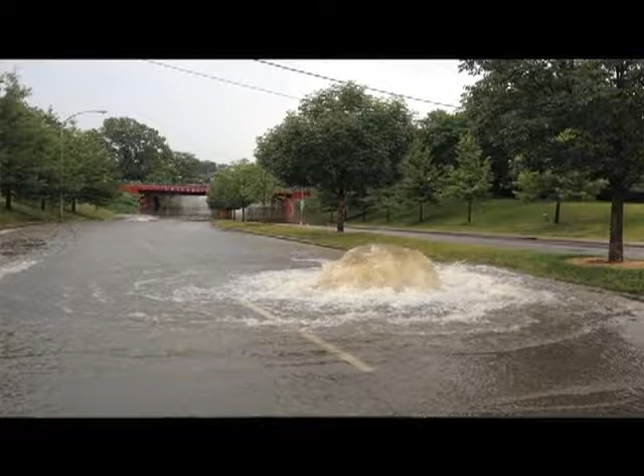We want to make sure you understand that, so you can take precautions. It could be in the stream, it could be in the street—sometimes you see it happening, sometimes you don't.

But it all ends up in our water bodies and waterways, in the form of litter, human waste, and debris that comes out of the sewers—things we may not even know is happening, but we see the end result. So we're here to talk about that.

We're going to talk about why these sewers overflow in the first place. Because if you didn't know that was happening, your next question should be, why in the world aren't you doing something about that? And we are—so we're here to share what MSD is doing to help.

But we're also here to share what you can do to help us help the problem, because MSD alone can't do everything that needs to be done to take care of the system.

A lot of it happens on the side of the sewer that we don't own or maintain, so we're going to talk a little bit about that as we go through.

Now, do you remember the days of Smokey the Bear, and 'do your part, help prevent forest fires'? Well, this is Kid Win, and he's our mascot helping us spread the word to help clean up our waterways.

So he's going to show up from time to time as a way to break up this presentation, so you're not just sitting there listening to me talk and wondering when you can get out of here, okay?

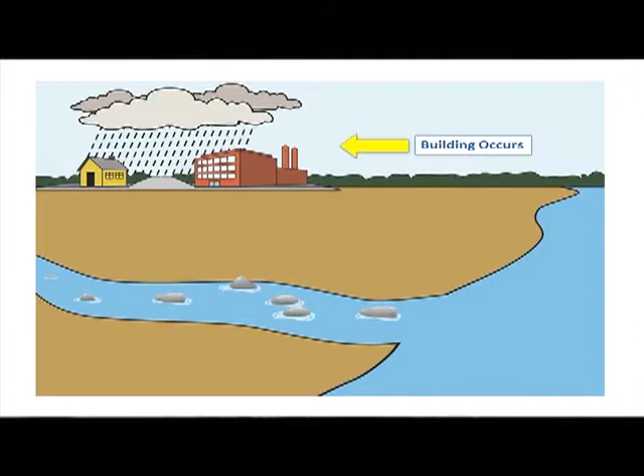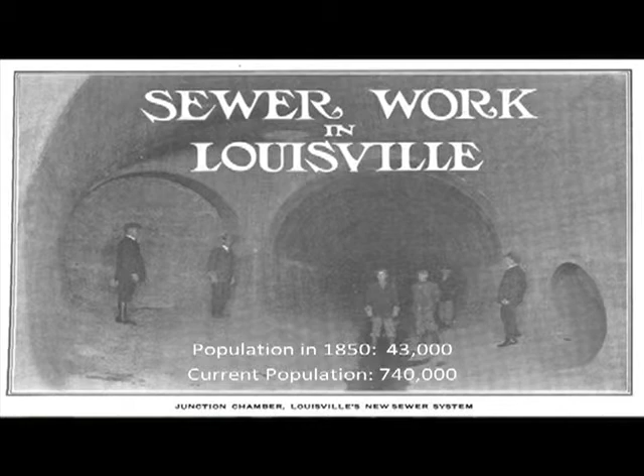This is a picture from 1850 where sewers began to be developed. There were only 43,000 people in the city of Louisville at that time, and we're sitting at about 740,000 now. So back then, they planned for growth. They made some really, really big sewers, but really what they did was take the existing creeks that were already there and encase them in concrete or whatever they could find.

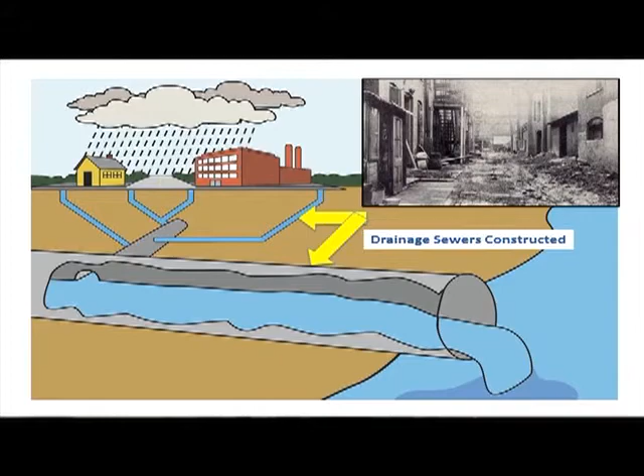So here's a picture of some of those systems. Some of them were very crude - they just dug out the drainage ditch and put something on top of it so they could build on top. And theirs was very sophisticated, where they built a huge sewer.

We still use this sewer, by the way. It's in great shape. This was obviously before it had any water in it, and these folks were able to stand in there in their suits and ties. But this sewer, on an average day, won't run as high as those folks that are in there, but you can see how big it is. It's 27 feet tall by 17 feet wide. It's huge.

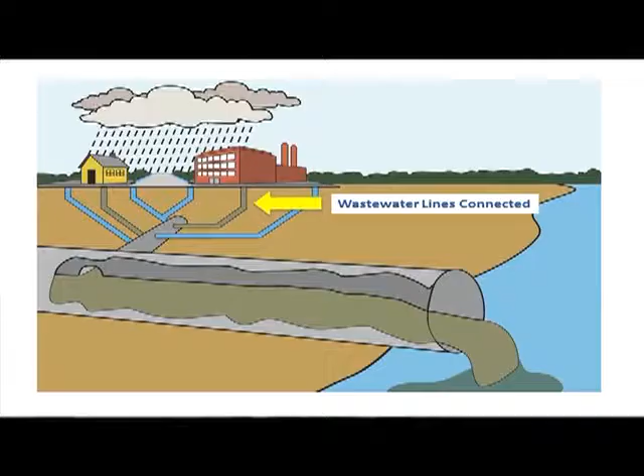Fast forward some more, in the 1860s, the Louisville Water Company got running water into homes and businesses. So now you have a situation where you've got a lot of fresh water coming in very fast, which means a lot of waste is being developed very fast, and so you've got to find a way to get that waste out of the house. The chamber pots and waste disposal methods they had weren't working, so they had to figure out how to get that waste away from the people faster.

Well, remember, there's these big pipes that were the streams that are now bigger pipes going straight to Beargrass Creek or the river. They just connected it to that pipe, and so now you had not only stormwater going when it rained, but you had waste from homes and businesses going out to Beargrass Creek and the Ohio River every day. That was the method that was used before treatment.

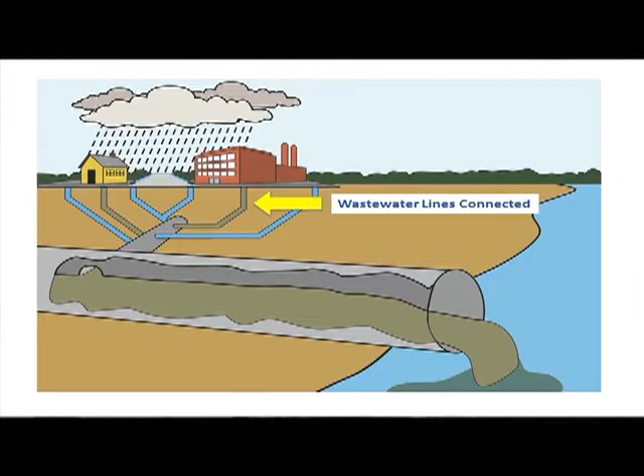So we know that getting running water to the houses and getting sewers in the ground were good for public health, because we show where typhoid rates and disease went down when that occurred. But we're still before the time of wastewater treatment.

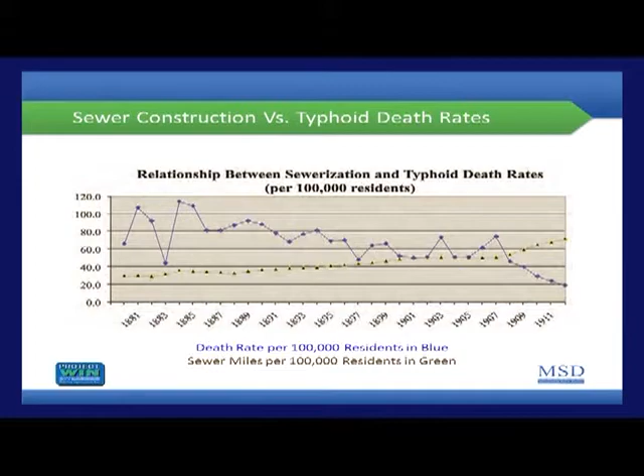So in 1948, the Federal Water Pollution Control Act mandated that entities, cities, put in wastewater treatment. It took 10 years from that mandate for the city of Louisville to build and put into operation our first wastewater treatment plant, which we at the time called Fort Southworth, which is still in operation.

It's called Morris Forman now. So go back then, you've got the water that falls on the ground when it rains, plus you've also got the waste that's going into the pipes every day. So those pipes are going to fill up, because they knew back when they built these pipes, they would never build a system large enough to treat all of the stormwater and all of the wastewater. So they sized it for all of the wastewater and as much of the stormwater as they could treat at the time. So the water comes in, hits the ground, goes into these pipes, gets into the big pipe that used to be a stream that went out to the river or Beargrass Creek.

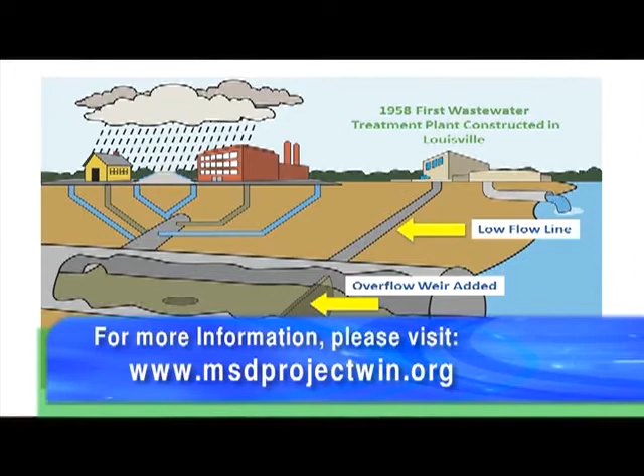Where it used to go straight out, since the treatment plant is there, they put weirs in the old stream that cannot go all the way to the top because there's too much water in that pipe when it rains. They put an opening in the bottom of that old stream bed, now a pipe, and drop that flow in on a dry basis. Every day it comes in, goes to the treatment plant, gets treated, and comes out. When it rains, there's more water than can get in that smaller pipe.

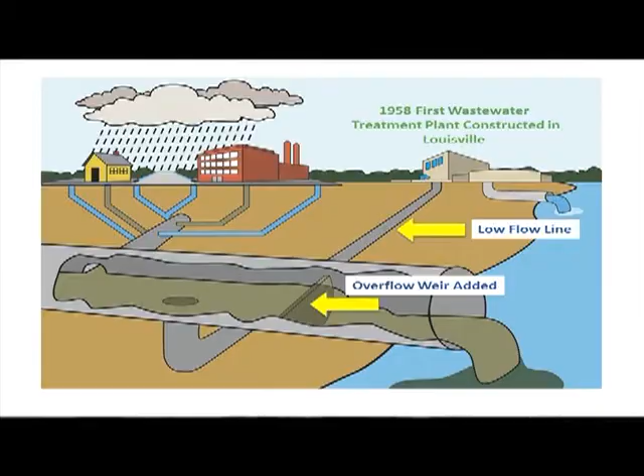So the rest of it goes out to Beargrass Creek or the Ohio River. That's how sewer overflows first came to be in Louisville. It's like this in every river city east of the Mississippi. They all developed the same way, and they developed further because that was the technology of the day.

Now, development started in the city of Louisville and worked its way out. Picture the Watterson Expressway, I-264, as the differentiating line in 1955 where development had worked its way out. In 1955, the state of Kentucky said you can no longer build sewers where all the drainage and all the sanitary flow is in the same pipe, because we've learned that's not the correct technology to use.

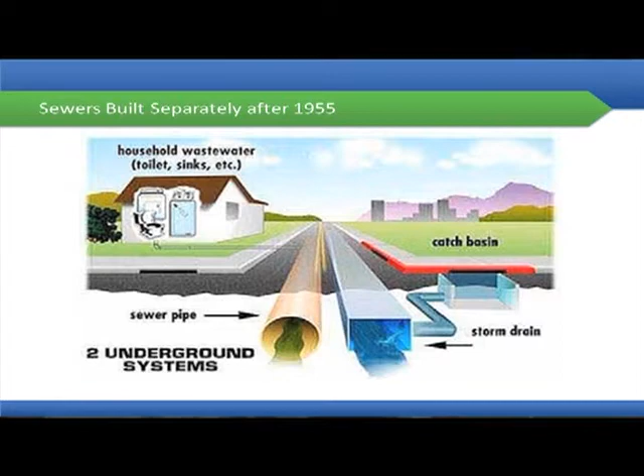So what they said is that we had to do it separately. In the picture you see a separate storm sewer system, which could be a pipe, a channel, or a ditch in the yard, and a separate sewer pipe. Theoretically, they're supposed to be separate.

But what we have found is that everything wears out with time. The sewers that were originally put in were made of clay, terracotta-type material. Picture terracotta pots you plant in — when they dry out, they crack, and as the roots of that plant grow bigger, they create openings, and if you barely nudge that pot and it falls over, it's going to break. The same thing happens underground with the pipes that were put in using the technology of the day.

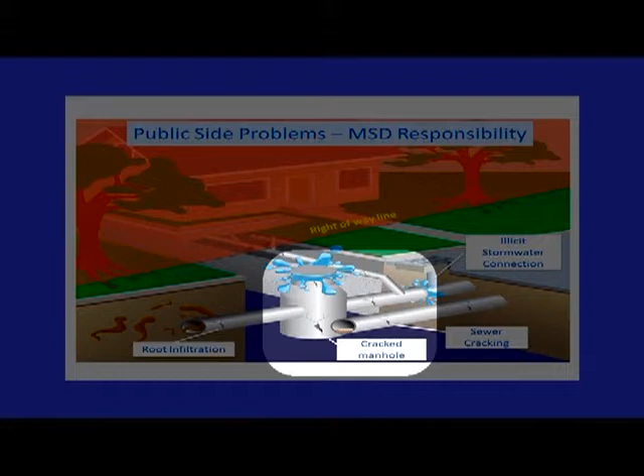We're slowly lining through those pipes and getting rid of those, but what we found is that they will crack, and as development occurs, you'll have stormwater catch basins connected to the sanitary line instead of the stormwater line. That manhole barrel, the connecting point, will also over time crack as ground freezes and thaws, and we have movement in the ground as you go through the seasons, and over time that's just something that happens.

And then you have roots — particularly in the summer when it's dry and there's not a lot of rain and water for the roots, they're going to seek a nutrient source. So if they find the smallest crack in that pipe or manhole, they're going to grow into it, and they're going to make that crack larger. It's just a process that continues.

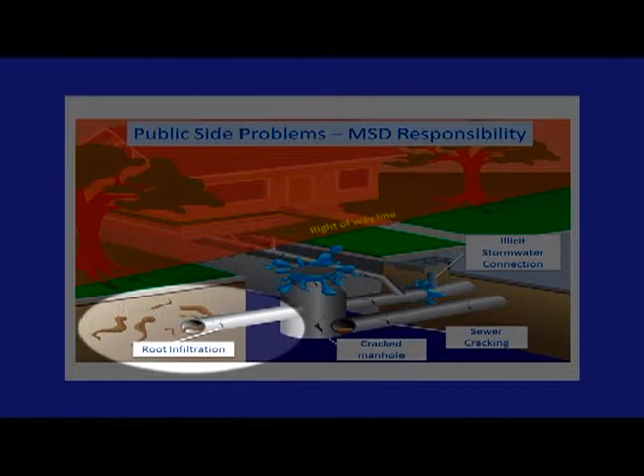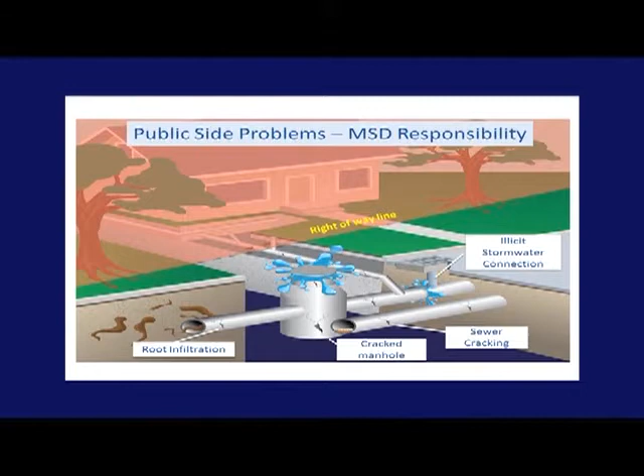So those are things on the public side of the system, or the right-of-way line, up to which MSD will maintain, versus what we're getting ready to talk about — the private side of that line. Let's look at that. There's that right-of-way line where probably there's a clean-out on your property, whether it's a residential home or a commercial property. That clean-out is pretty much the differentiating line between the public side and the private side.

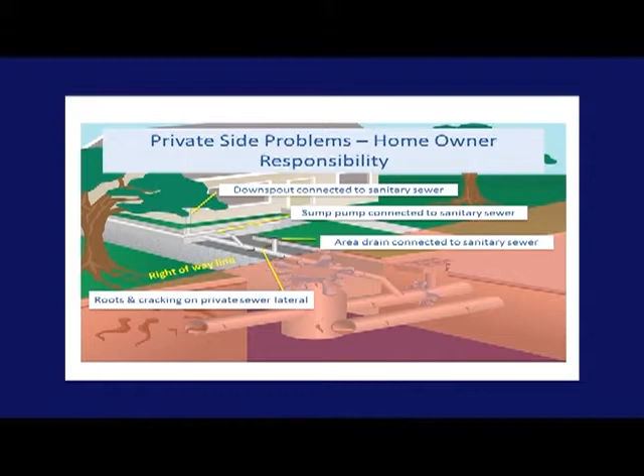The same types of things can happen on that private side, but a little different. A downspout that takes rain off the roof — instead of connecting that out onto the ground and letting it run across the grass, it can be improperly connected to the sanitary sewer, so that's taking stormwater and putting it in the sanitary sewer.

Or you could have a groundwater sump pump that is protecting your basement from groundwater. It's okay to have a groundwater sump pump, we just have to make sure it goes to the right place. We need to make sure that groundwater sump pump is not pumping into the sanitary sewer — it needs to go out onto the ground or into the stormwater system.

You could have an area drain, an area that's part of your grass or a parking lot, that instead of taking that water to the stormwater system, puts it in the sanitary sewer. Then that private line that comes out of the home or business up to the right-of-way line is the responsibility of the property owner to maintain.

It's made of the same material. The older ones are made of clay. They can crack, get roots in them, and break. Sometimes you'll find this out the hard way and have a backup into your building or home, and a plumber will come out and tell you that's on your side. Sometimes you may not know that's going on until there's a problem.

We do have a program that will help the homeowner or property owner with the maintenance of that private line. You can get information today from our customer service representatives about the sewer line replacement program, where we will finance the fix of that line to make sure it's in good operating condition.

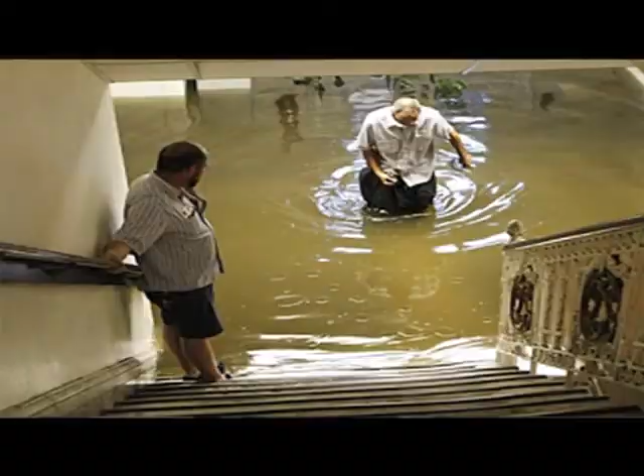Sometimes those overflows are your neighbor's basement or your basement, and we want to make sure that's not happening. Where that's seen the most, when those sewers are overflowing, it could be a backup. That's a direct impact to public health, and we're really trying to get the word out to help us stop that from happening.

So here's another check-in point. One of the takeaways is that we can avoid, if possible, running our dishwashers and washing machines when it's raining. Please note, I'm not asking you to not take a shower, not take a bath, or not do a load of dishes in the sink, but to refrain from those large sources of water if we can.

Here's another thing I bet you don't know, and you'll never know the impacts until something bad happens. When we flush things down the toilet that don't belong there — they belong in the trash can — they find their way very strategically around the impeller of a sanitary pump station. Dental floss, hair from brushes, Q-tips, and flushable wipes that are not actually flushable, regardless of what the package says, wrap themselves around the pump's impeller, and when enough wraps around it, it stops pumping.

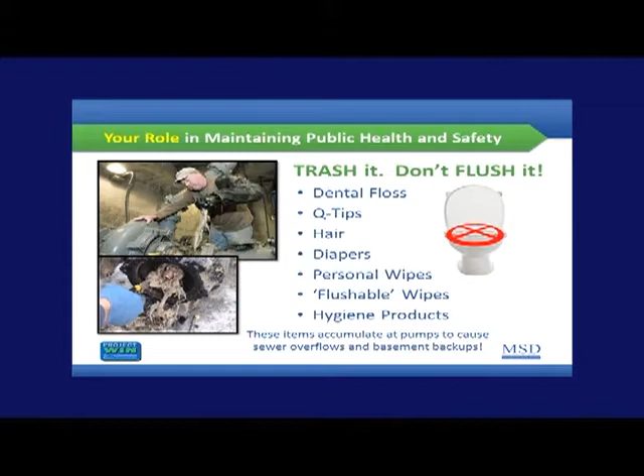Imagine when a sanitary pump station that's meant to keep sewage moving downstream away from the house stops pumping. Bad things happen, and bad things result in basements that back up. We want to prevent those from happening, but we can't stop that. We can only react to it because we don't know where that source is coming from. So we're asking everybody, every chance we get, if it belongs in the trash, throw it in the trash. Don't flush it down the toilet.

I'm sure you've heard about fats, oils, and greases and what to do after you cook. We've been talking about this for a long time. That rumor used to be that if you turned the hot water on long enough and got it really hot, you could pour your grease down the drain and it would go away. Well, if you're lucky, it might leave your sink, it might even leave your house, but it probably isn't going to get very far before it congeals.

And when everybody's doing that—or it really doesn't take a lot of people—it's going to fill an 8-inch sewer that's out in the street pretty fast. It's going to be like a pump station that stops pumping; it's a sewer pipe that stops flowing. And again, the same result: we have basements that back up and overflows that happen.

So what we're asking people is, don't use your garbage disposal. Don't put it down the sink. Let it congeal. Take a napkin, take a paper towel, take all food, all sources—if you're not composting it, put it in the trash. Because it's going to find itself in the sewer, it's going to bind up, and it's going to create a concrete-like substance, as you can see here, and it's going to cause backups.

Again, we can't stop this from happening. We can only react to it after it happens, and it's a bad thing. So we need your help going through this particular situation.

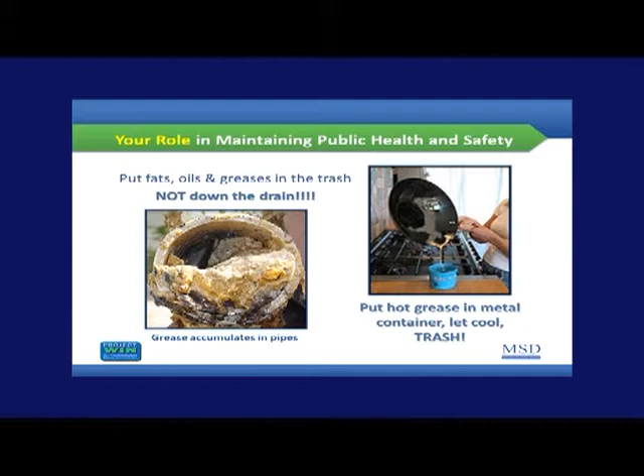So here's a check-in point: what do we do with dental floss, hair, and those wipes that even though they say they're flushable—put it in the trash, don't flush it.

A lot of times we're going to see that when it's raining that way, there are a lot of sump pumps pumping groundwater, protecting basements, but instead of putting it on the ground or into the stormwater system, those sump pumps are going straight into the sanitary sewer. That sanitary sewer is not sized to take that—it's sized to take waste from homes and buildings only. So when we've got sump pumps in our basements or on our foundations pumping into the sewer, that's what's causing those massive overflows, at least 50% of it.

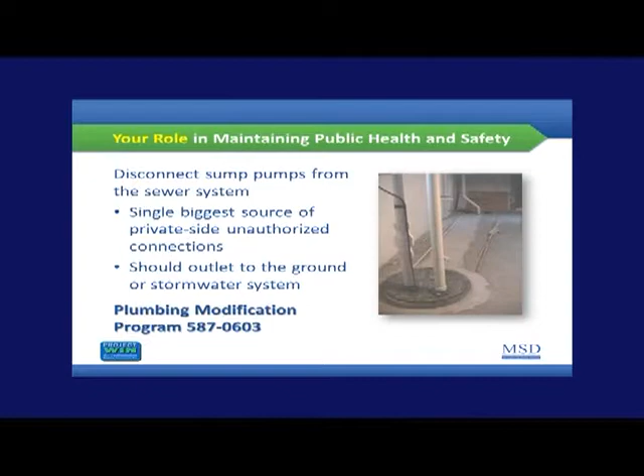So again, we've got a program, the plumbing modification program. We'll disconnect it, we'll pay for the disconnection to help with that, but we've got to have your help to identify that. You can get that information—again, the customer service desk can give you that information. We'll walk you through the process. We'll pay to have it disconnected, but we need you to help identify where that might be.

And then downspouts—a downspout in the summertime is a free source of clean water that you can use to water your gardens, your yard, that we're hoping isn't going into the sanitary system. Like a sump pump, we'd rather you turn that out onto the ground, into the grass, away from your foundation, or turn it into a rain garden, or put it into a rain barrel. We've got information on that, but it's just a way to keep more stormwater coming off that roof—an amazing amount of water during a good rain—out of the sewer system if we can't keep it on the surface.

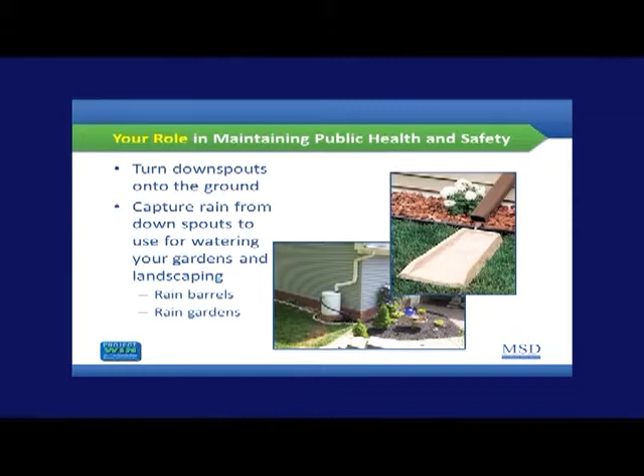So here's question number 4: FOG, what does FOG stand for? It's fats, oils, and grease—basically any food that you're cooking with or that is residual after you've cooked and eaten. We're asking that you put it in the trash, don't dispose of it down the drain.

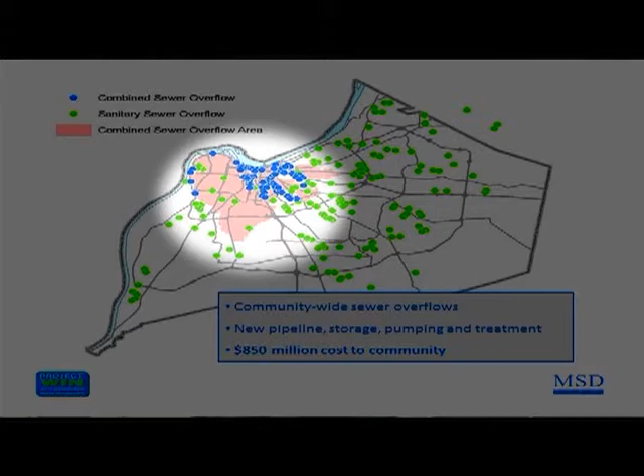The blue dots in this area represent the combined sewer system - those are the earlier overflows that were built before wastewater treatment. The dots outside that area are separate sanitary sewer overflows, from systems that were built with separate stormwater and sanitary systems, but sometimes there's too much stormwater entering that sanitary system from different sources.

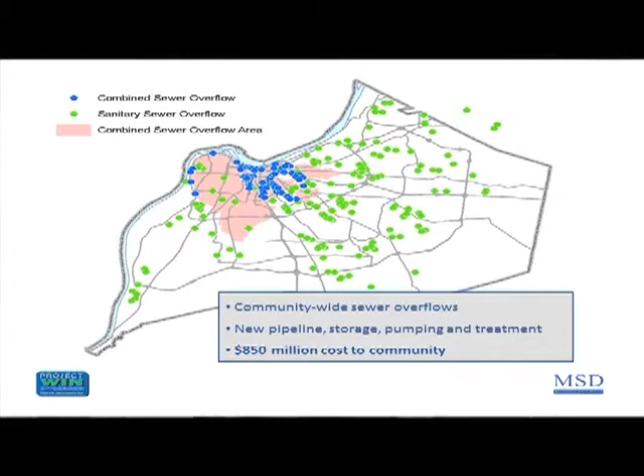So what this map represents is that there is no area in Jefferson County that's not subject to sewer overflows. We have a community-wide problem that's going to require a community-wide solution. We're taking this message all across the community, to say help us take care of this situation so that we have a safer place to be.

So a little bit more of the history of how things have progressed. From the 1980s through 2005, MSD was focused primarily on getting rid of sources of pollution that were occurring every day. As development occurred and moved out from the core of the city, it happened in pockets, and so there were what we call package treatment plants, or small treatment plants.

They were not operated by MSD or the commissioners of sewage at the time - they were operated by the developer of that subdivision. The state asked MSD to take those out of service because we could do a better job operating them, keeping them in good operating condition, and ultimately eliminating them. So we spent several years acquiring those, fixing what we could, and ultimately taking them offline and connecting them to the municipal system that's in place today.

We were doing that while also addressing the sanitary overflow situation that was going on. But EPA came in and said, we recognize what you're doing and it's a good thing, but you're not working on those other problems of pollution, those overflows, fast enough. And what they said is, we want you to now focus on that.

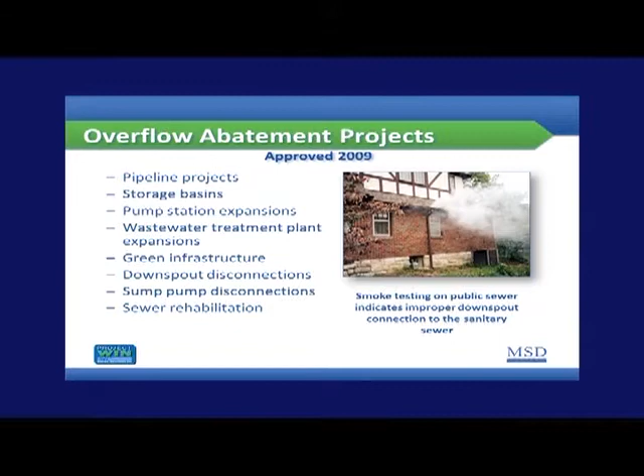So what you see here is on a dry day in this particular neighborhood, we were testing those sewers to see where the leaks are. When the sewer levels are low, it's not raining, it hasn't rained, there's not a lot of water in there, we'll fill those with smoke and see where that smoke comes out. In this case, it showed us that particular home's downspout was connected to the sanitary sewer. So we're able to tell the homeowner, and work with them to put them through the program to help get that connected properly.

So just as a check-in point, we're halfway through the program. We're about 51% complete. We're running right at budget, actually a little bit below budget, which is a good place to be halfway through the program. So we're always checking that to see where we are on that federally mandated schedule.

In terms of where we've been working, because there's a countywide problem of overflows, and there is only so much money that can be spent at one time because of how it's paid for, and the schedule to accommodate everything by the end of 2024, we've been working in certain areas very systematically to make sure we could take care of things in a proper order. You work upstream, starting at the top and working through the bottom of a particular area, or in some cases you work in areas where EPA tells you to go work first. We've been doing that in Beechwood Village, Hikes Point, Highgate Springs, where the majority of the overflow volume and occurrences were happening, and that's where they told us to go work first. We finished that work in about 2012.

We've been continuing to work through. We've been doing some work in Camp Taylor, and we'll tell you where we are on that. We're continuing to work in the areas of J-Town and Prospect because there are 6 treatment plants, some of those older original plants, that are in that older age of plants that are failing, and EPA wanted us to remove those by a certain date. We're doing that - those will be finished by the end of 2015. By the end of 2015, there will only be 5 treatment plants run by MSD in Jefferson County. That's huge because we started at about 300. So every time you eliminate one of those, you reduce an everyday source of pollution into those creeks that we like to recreate in.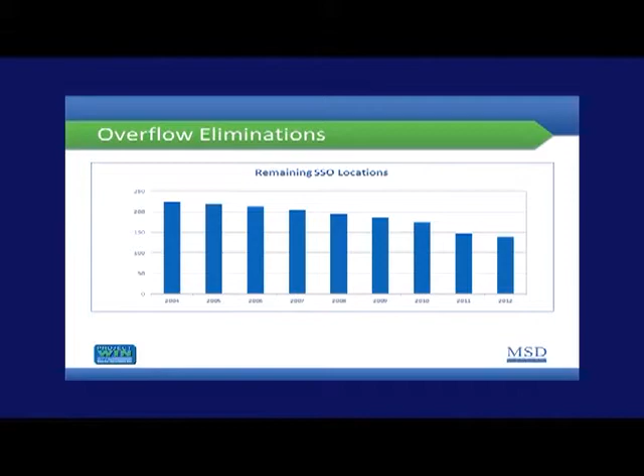So here's how to show the progress that we've made in terms of overflow locations. There's over 200 SSO locations - these are not the combined sewer overflows in the older part of the system, these are in the separate sanitary sewer and separate stormwater system. We started at about 225, and you can see how that number slowly goes down. Every project takes about 2 to 3 years on average just to construct, and another 1 to 2 years to design, so the process is slow. When you start that in 2007, you can see how we're slowly building that out, moving these projects forward, and those numbers will start to come down.

So here's a check-in point - this is question number 5. It says sump pumps should discharge to the ground or to a stormwater system and not into the sanitary system. We are asking you to check: if you have a sump pump, check and see where it's going. If you don't know, or if you know you have one and don't know where it's going and it hasn't been checked out, call MSD at that number and we'll work through that process with you and help you get that reconnected out into the stormwater system.

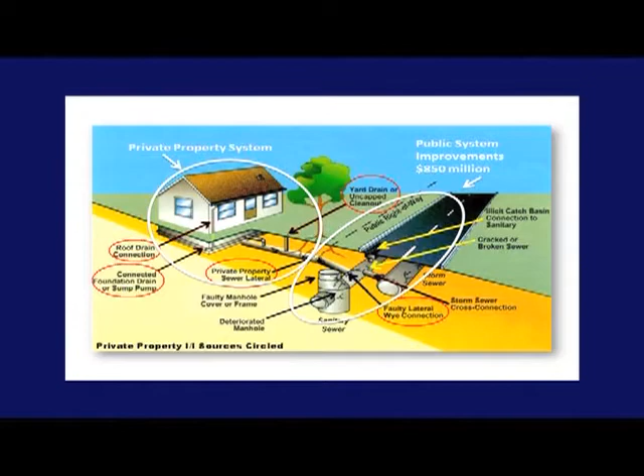We've talked about what we're doing on the public side. There is a cost associated with that, about $850 million to fix the problems on the public side of the system, from the right-of-way line down to the treatment plants. Some of the other things we talked about are that there are still openings in the system, still defects causing overflows on the private side of that right-of-way line, where we've asked for your help going forward to partner.

The last question on the little blue sheet is question number 6. It says, to make good use of fresh, clean water, we can use rain barrels and rain gardens. We have information at the customer relations table if you'd like to learn more about incorporating that on your property. You use them in the summer - rain barrels are only for the summer, not to be used in the winter because they will crack and break. It's a summertime usage.

So as we look at where we are and working together to fix this problem, we want you to take this home. On the back side there's some information, some phone numbers to call if you want more information or if you experience a problem. If you see a sewer overflow - it could be in a creek, in the street, or along the property line - please call us at this number, because sometimes you might be the first person to see it, and as soon as we become aware that it's happening, we'll make sure we send somebody out there to address that.

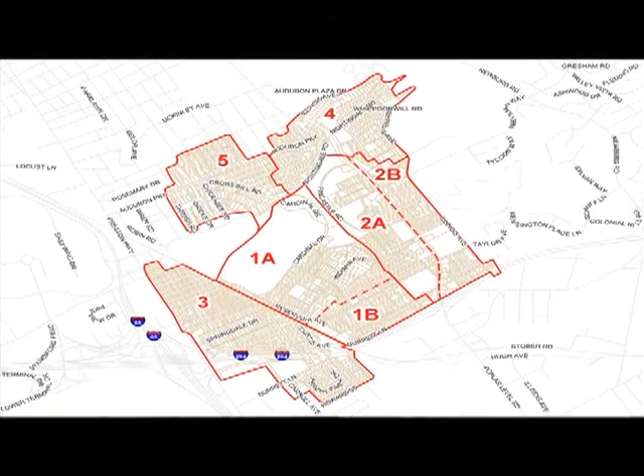One of the first things we discovered when doing the SSES is that we needed to expand the area. We always talk about areas 1 and 2, which is Camp Taylor, but area 3, Prestonia, Audubon Park, and areas 4 and 5 all flow through the Camp Taylor interceptor. So it didn't make sense to make improvements only to areas 1 and 2 without addressing the surrounding areas. For example, once we got into area 3, we confirmed over 180 homes had their downspouts connected. So if we didn't address all the areas, we wouldn't ultimately help Camp Taylor.

So the SSES recommendations gave us our checklist of what we needed to do. We needed to work with the neighborhood as much as possible to disconnect downspouts and sump pumps, and to look at existing area drains and yard drains. As part of the development, it appeared there were a lot of situations where, if a neighborhood corner had a drainage problem, a catch basin was put in place and tied directly into the sewer to get it out of sight.

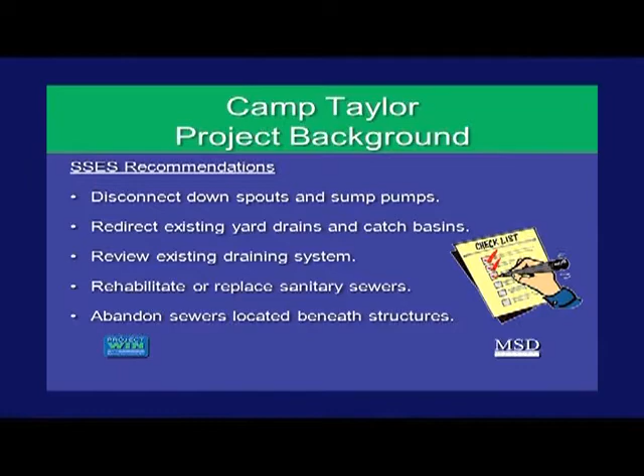We also need to review the existing drainage system. Any disconnections we do, downspouts or catch basins, we want to make sure we don't cause drainage problems in the area. We'll rehabilitate or replace sanitary sewers in the area. And a commitment we made is that we would abandon anything located under structures.

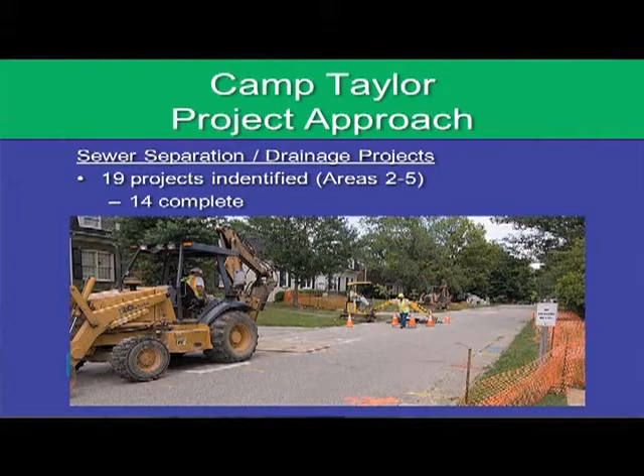So our first approach was the 19 area yard drains. You may have seen us out in the neighborhood - this covers areas 2 through 5. To date, we've disconnected 14 of those catch basins or area yard drains that were sending roadside drainage or area drainage into the sewers.

Areas 3, 4, and 5 have older sewers that were actually designed and put in place as they should have been. It's just that in the 50s and 60s, using terracotta pipe, a lot of them need to be rehabbed. In area 3, construction is already going on in the Prestonia area - approximately 16,000 linear feet of sewer repair and 80 manholes. Most of the work, which you've probably seen out there, is done without digging - we line the sewer lines, and once they cure, it becomes a new plastic pipe. It's a really good way of getting some of the sewers completed.

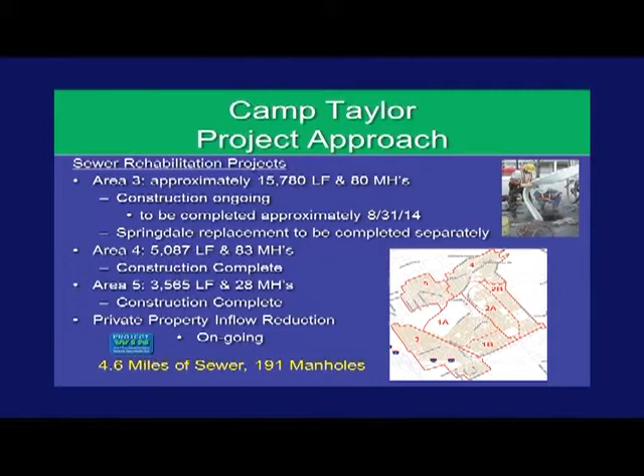In areas 4 and 5, we have completed all the rehab work - a little over 5,000 feet of sewers repaired in area 4, and about 4,000 feet in area 5. To date, we have lined or repaired almost 5 miles of sewer across these 3 areas.

The next stage is the Camp Taylor area, areas 1A and 1B. We're going to replace approximately 19,000 linear feet of sewer and 92 manholes, with construction scheduled to begin this September. I've been informed by staff that a lot of consent release forms have been sent out, and we're waiting for customers to return them. These forms give us permission to do the disconnections and improvements on their property.

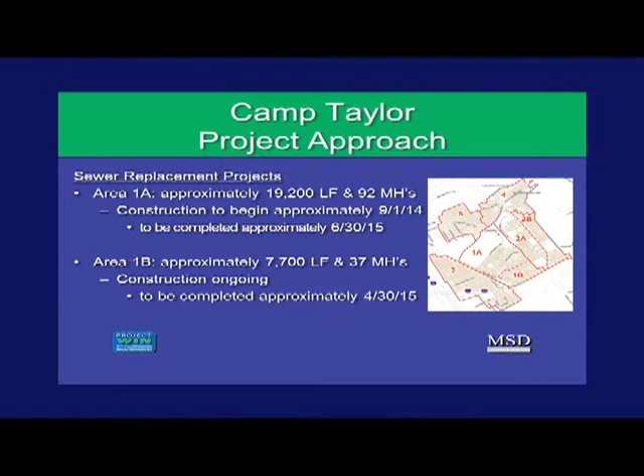That's ongoing and scheduled to be completed by the end of June 2015. Construction is also ongoing in area 1B, which is about almost 8,000 linear feet of new sewer, scheduled to be completed by the end of next April.

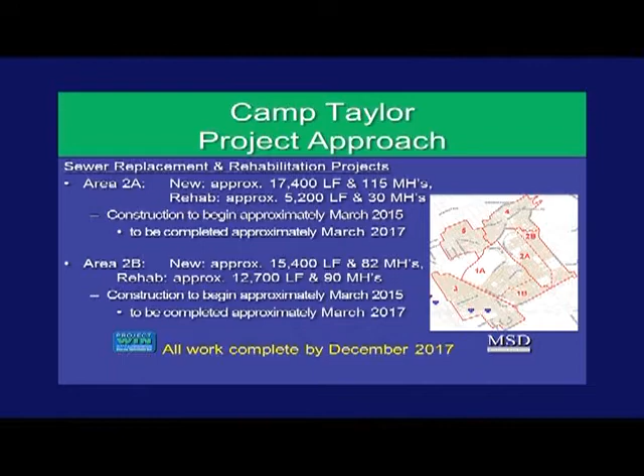Areas 2A and 2B are currently under design, with construction to begin approximately March of next year, 2015, and completion by March 2017. It's a large area, with 2B including another 15,000 feet of new sewer and rehab of approximately 13,000 feet of sewer, also beginning next March 2015 with completion in 2017. We're under a federal mandate, so while we hope to finish sooner, all work must be done by December 2017.

Moving on to the next part of the presentation, the Nightingale Pump Station and CSO Storage Basin. I'll go over the existing plan I presented at Camp Taylor Elementary School about a year and a half ago, and talk about the additional information and changes in the plan, and our path moving forward. As with all our projects, we want to provide opportunity for input. Our design staff working on the Nightingale pump station is here in the back, so feel free to write a question on a card or talk to them individually after the presentations.

Many of you may not know that at the end of Camp Taylor, as you move away from Poplar Level Road, there's a 27 MGD pump station—one of the larger sewer pump stations in our service area. I want to emphasize this is strictly a sanitary sewer CSO pump station, not a flood pump station. It handles what gets into the sewer pipes and sends it to our Morris Forman treatment plant to be treated; it's not for drainage or flood protection. It serves about 24,000 acres, a large service area, and diverts two of our larger interceptors, the Beargrass Interceptor and the Beargrass Interceptor Relief, serving Camp Taylor and surrounding neighborhoods.

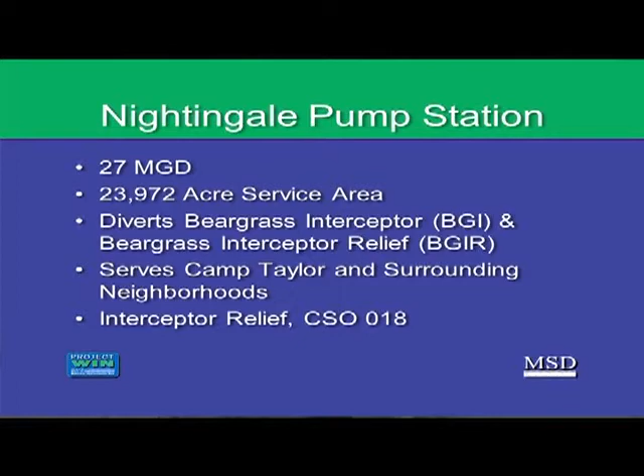This station is a little different since it's far out—typically we don't have a combined system in this area, but we do have some CSO reliefs. This is the reasoning for our consent decree project: there's a CSO associated with it, a permitted outfall that, when it rains, discharges combined sewer into the creek.

Just real quick, if you haven't seen it, this is the pump station—a square building above grade. When we're done with this project, that building will no longer be there. Here's the property in plan view: this is the pump station, and there's the CSO associated with Beargrass Creek that discharges during wet weather events.

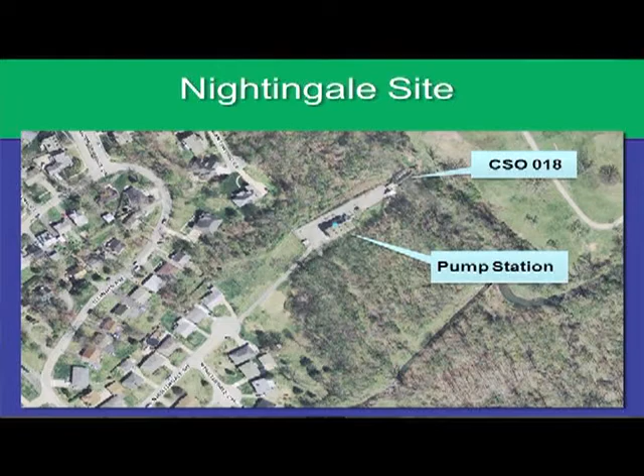To talk about the service area real quick—you've seen this map a thousand times, it's all over the room. I just want to emphasize that part of it, the Camp Taylor area, flows through the Camp Taylor Interceptor, so all five of the service areas we're working on flow northeast to this pump station. The star shows where the pump station is located on Nightingale Road.

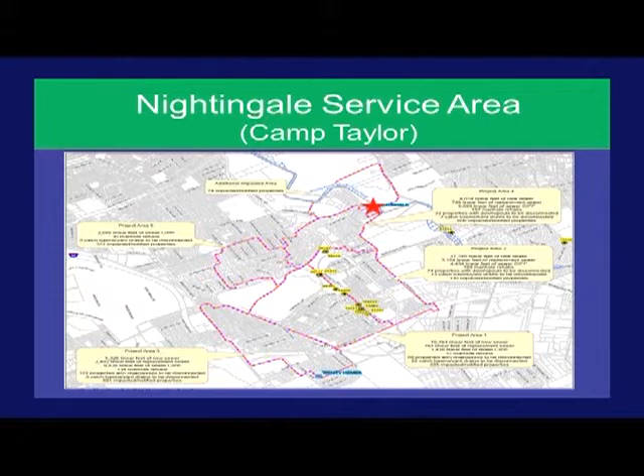To talk about the magnitude of this pump station—on the other side of the service area are the larger interceptors I mentioned, covering a large service area down to Shelbyville Road, bordered by 64. This large service area comes down to the pump station on the east side, so it is a significant pump station in size.

The original plan submitted in MSD's IOAP was to replace the 27 MGD pump station with a new 60 MGD pump station. The thought process was that as excess flow comes in, we'd pump as much as possible to treat at Morris Forman. That required a new force main—significant to the neighborhood, since the existing force main is 5,780 linear feet, and we would have had to construct all the way up Nightingale Road and through neighborhoods, which could have been a potential impact. The improvements would have been at the existing site, with a completion date of 2016.

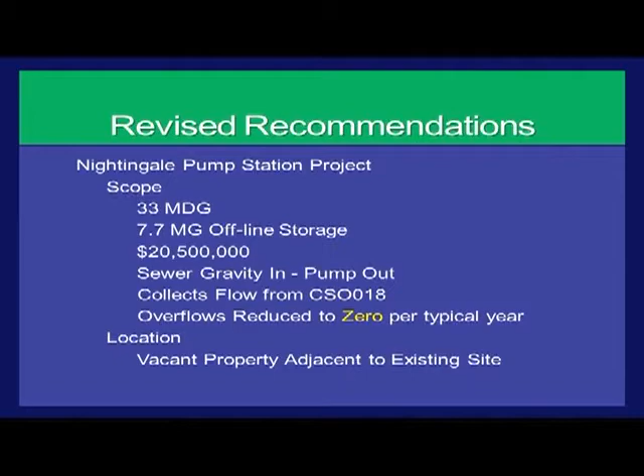We got into integrating, reviewing, calibrating, and fine-designing everything, and what we concluded is that we could replace that 60 million gallon pump station with a smaller 33 million gallon pump station, associated with 7.7 million gallons of offline storage on the site. It would be a sewer gravity in, pump out station, and this will allow the additional flows at CSO 18, so for a typical year we can control the flows where we have zero overflows.

The big benefit of this project is that we can do everything on the existing pump station site, which eliminates that long force main and construction through the neighborhood. This is the existing site, and what I've done is we're going to stay within it. Please note we are at an early design phase, so everything is very preliminary, but in general this is the existing pump station building.

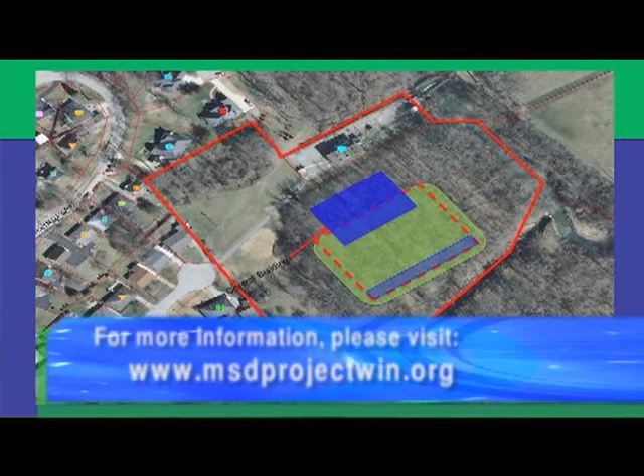It will go away and there will be a new building. I've drawn it a little oversized just so everybody can see it, but it'll be approximately the same size as the existing building, maybe a little smaller. There will also be a storage basin underground, so pretty much the only thing anybody will see is the new pump station control building, not much different than what's already there today.

A quick draft plan, going into a bit more detail — there will be a road that accesses all sides of the pump station. Again, we're talking about replacing the existing building with a similar one; everything that's there will be taken away. I've put a dashed red line showing where the underground storage basin will actually be.

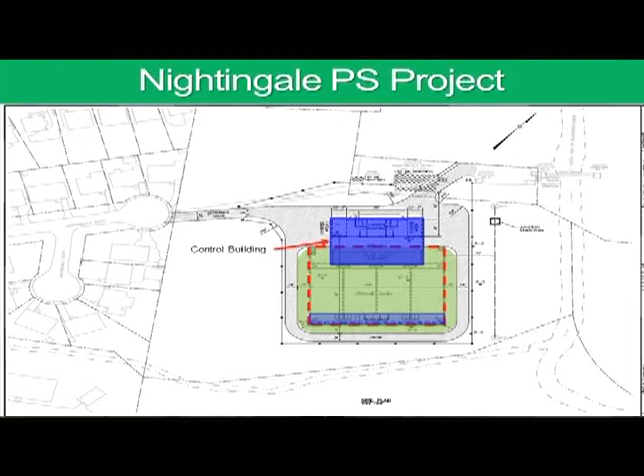I put green in there showing that area is intended to be grass. Again, this is very preliminary, but we're already thinking ahead about what we should do as we work with the neighborhood and continue our design. We've already started thinking about how we could landscape this.

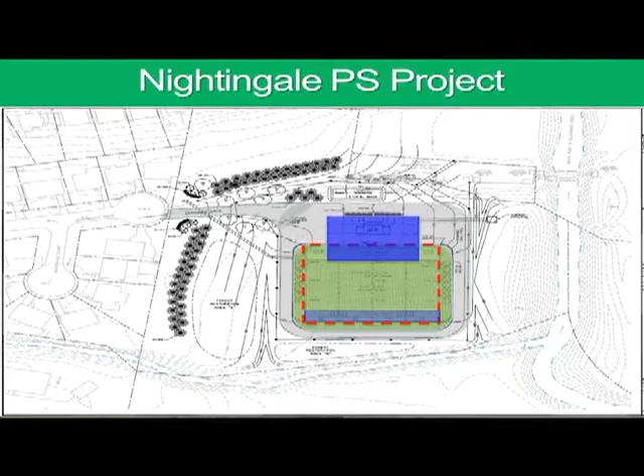This will be the landscaping plan — again the same layout and building profile, but with trees and other elements we can use to screen this facility and work with the neighborhood.

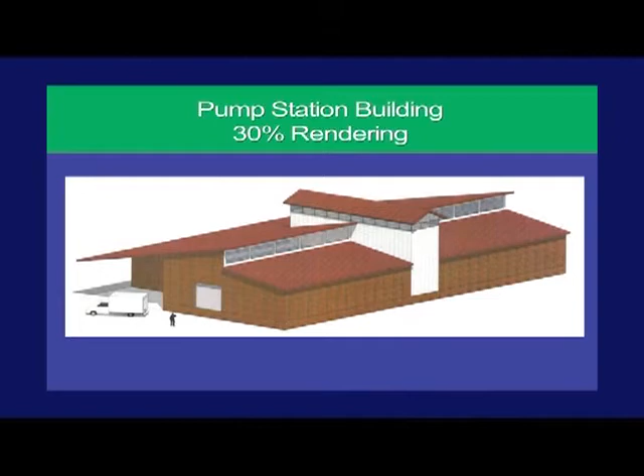This is a proposed rendering of what the building would look like. Again, this is 30% design and we're still accepting input from everybody, but we tried to put something in there that's a little more aesthetic. The old building there today is an older brick design; this would be a bit more aesthetic.

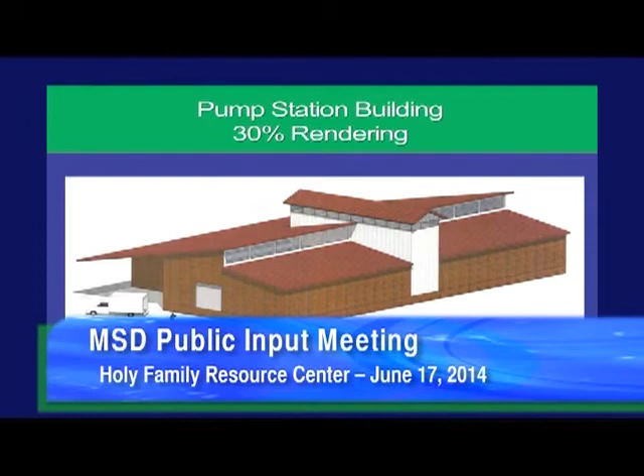We could go out, work at it, and get input from the neighborhood — just another view of the size of it. So this gives some idea of what we're talking about putting out on site.

Moving forward, we are complete with planning, so we're ready to move forward with the project. Preliminary design is complete — we know basically what we need to do and what is needed on site. We plan to have final design complete by September, advertise for construction in October, and start construction the 1st of 2015. This project has a consent decree deadline of December 31st, 2016, so it will be done before that.

As I said several times during this presentation, input is very important. A lot of times I get feedback that MSD already has our mindset and knows what we're going to do. It's not exactly a clean slate that we're starting with, but we do want to emphasize that it's important to get your feedback — that's why we have these meetings.

So please get with staff — we can talk about things and you can provide your input. If you want to think about it, there's still plenty of time. We will have several different phases of design where there'll be more opportunity for input, to talk about the concepts and get information about site layout, building aesthetics, and so on.

If you don't want to talk today, if you want to take a little time to gather your thoughts, that's fine — we'd also like any input you have today on both projects to be presented or sent to MSD by July 17th, 2014.